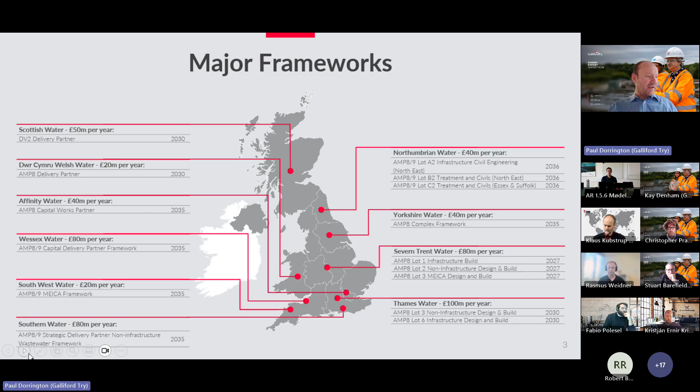So in a nutshell, that's me wrapping up the overview of Galliford Try's environment division. At this point, I'd like to hand over to my other presenting colleague, Stuart Barefield, who will talk specifically about PFAS within the UK.

Yeah, do you want to jump on the slide and move that one forward then, please, Paul? Yeah, it's just really to put a bit of context to why we're here. Obviously things are starting in the current investment period in terms of the guidelines really coming in from the DWI, based on a sort of tier structure to initiate actions really.

But looking further afield, Denmark - this is one of the reasons we're here - is because effectively Denmark have been doing this for longer, and they've also got some very stringent standards, which are actually in exceedance of the European standards. I've been to recent conferences, there's been the British Water event recently in Warwick, the Institute of Water. Some of the messages we're getting all the time across the industry are about collaborating and innovation. I thought this is a fantastic opportunity to reach out to Klaus and the Danish market really to understand what they're doing and see what we can learn.

Should be a little slow today.

So part of the introductions today to the topic, we are so fortunate to have Jonathan Gull Christensen from the Danish Technological Institute, who is a consultant within wastewater and residues from the wastewater. He holds a Master of Engineering in Biotechnical and Chemical Engineering, and over the last couple of years he has developed into one of the most knowledgeable experts we have in Denmark within the removal and destruction of PFAS from water, and he is also behind the idea and concept of the PFAS treatment train, which we will also see in action today. So, Jonathan, please take it away.

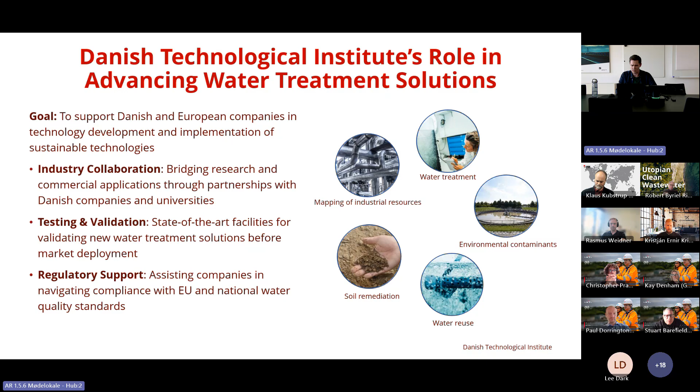What I'll be going through today is to introduce the problem. I'll only very briefly touch upon the problem of PFAS because I think we're all aware of that. Then I'll delve into some of the treatment technologies, and I'll have two cases here from Denmark. Of course there are many more projects going on, so I had to select a few now that I only have 20 minutes. Then I'll very briefly touch upon destruction technologies, and summarize in the end.

I'll just bring up a pen here. So, how it stands today is that we have PFAS everywhere in our environment. It has been in production for many years by now, so we see it in our groundwater, freshwater, marine environment, and everywhere really. And this is, of course, the PFAS that's already there, but we're also still sending out further PFAS into circulation.

And this primarily comes from different point sources. Those could be waste management sites or different landfill sites where you have leaching out into wastewater treatment plants. And the wastewater treatment plants in Denmark are really good at removing different organic matters, also nitrogen and phosphorus, but they're really not capable of removing environmental contaminants in the same way, such as PFAS.

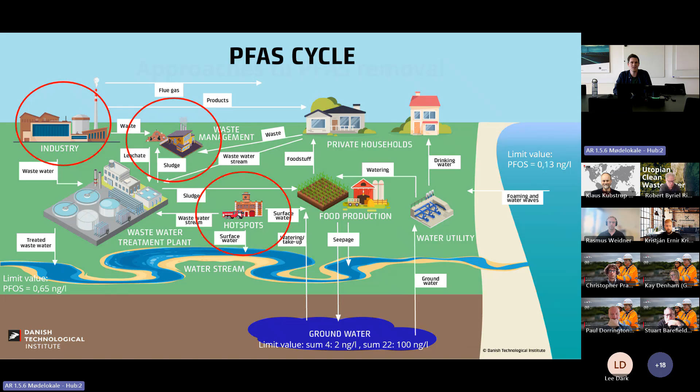I'll continue on to the PFAS removal, because that's what we're here for today. I like to divide it into two, because whenever I say PFAS removal, it has to do with both removal from the wastewater stream or from the environment, and then also a destruction process afterwards. So it's kind of a two-sided or two-stage process.

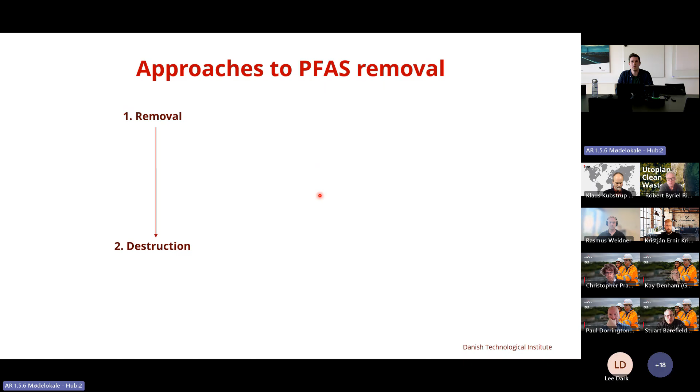Because if we only remove the PFAS, and then put it in another landfill site where it can leach out again, then we haven't really got to the core of the problem. So we have to also destroy and actually remove PFAS from this circulation in order to really get to the core of the problem. And that means complete defluorination of the fluorinated carbon compounds, which are the PFAS molecules that we are focusing on today.

When talking about removal more specifically, we can divide it into a more centralized or decentralized approach. A centralized approach would be to take care of the problem at the centralized municipal wastewater treatment plants, where we have most of the wastewater coming through, and then we will be able to implement different steps in order to accommodate the PFAS problem.

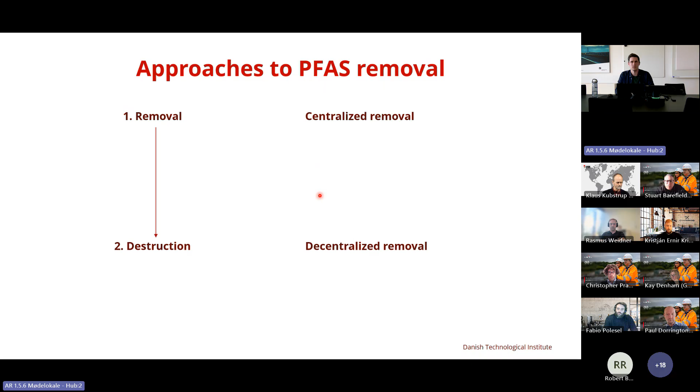Or you could do it more decentralized, where you focus on different point sources where you have more concentrated PFAS streams and remove it there before it's mixed with the rest of the municipal wastewater. And of course, there are pros and cons to both of those approaches, and probably both will be in use in the years going forward.

But if you do have a centralized approach, of course, as with everything, you'll have the economy of scale. Also, more specifically related to PFAS, there will be a lower organic matter contamination after the water's gone through the municipal wastewater treatment plants. This has a lot to say when we're talking about adsorption technologies for PFAS removal afterwards, since this then lowers the amount of other co-contaminants.

But of course, if we go for a centralized approach, then we'll also dilute our contaminants before treatment, and we'll have much larger volumes to treat. So these will be some of the cons of a centralized approach.

If you are to go for a decentralized removal approach, then you'll go directly to the source where you have high PFAS concentrations. You'll have minimal dilution of your contaminant. So you'll be able to remove bulk of the PFAS before you mix it in with remaining municipal wastewater with lower PFAS concentration. So you'll have lower volumes to treat.

But of course, you won't have the same economy of scale. And you will also definitely have a higher water variability. So it will not be as predictive as to what kind of wastewater will be coming into your plant throughout the year, or depending on the different cases. And you'll definitely also have many more co-contaminants than when mixed with the municipal wastewater.

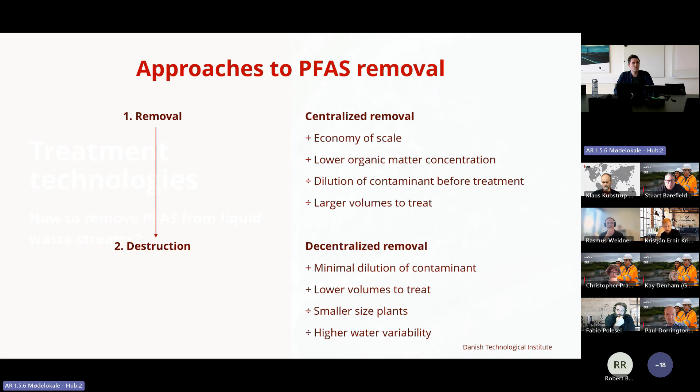So going over some of the treatment technologies and how to remove PFAS from liquid waste streams. The established solution, you might have heard this before, but I'll just say it again, adsorption is the established solution to PFAS removal.

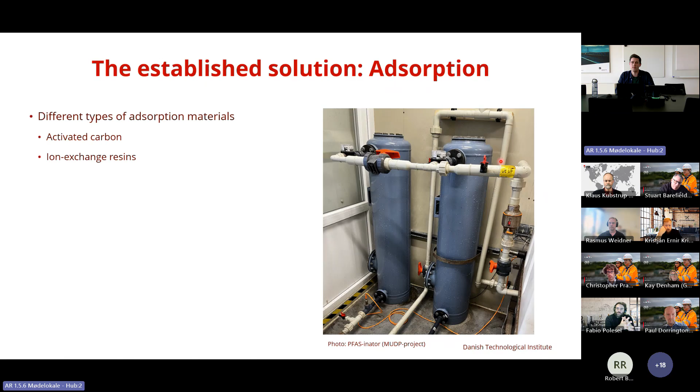This involves different types of adsorption materials, including different types of activated carbon with high surface areas, which are very good at adsorbing all kinds of organic molecules, including PFAS molecules. But mostly it will be tailored for longer chain PFAS molecules and not so much the shorter chain PFAS molecules, which are more mobile in the water stream and won't attach as much to the activated carbon. And then you also have ion exchange resins, which are more tailored towards targeting PFAS in general and also shorter chain PFAS molecules compared to activated carbon.

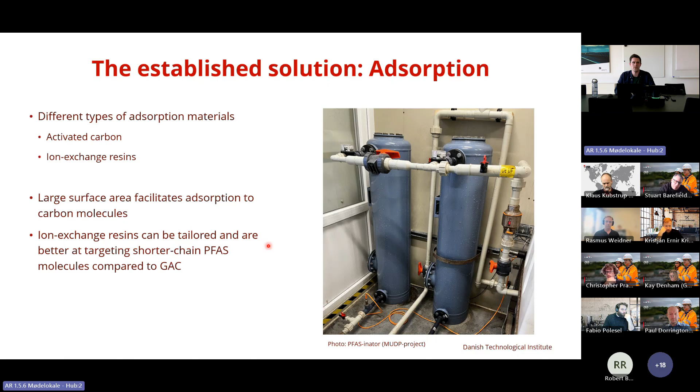Those are also more expensive to use, so it will also be a balance between what expenses will be there and what type of wastewater you have coming in, because the wastewater should be as free of other co-contaminants as possible before you send it through your ion exchange resin.

As Klaus mentioned, I don't think I invented the treatment train. It's just a word we use for a combination of different technologies for any particular treatment solution. But it's a good way to look at the PFAS problem, because often you'll have to have a sequence of different treatment technologies in order to achieve the removal rates of PFAS that we would like.

For instance, if we were to go for groundwater treatment, as we do here in Denmark, mostly we can make do with very little to clean our groundwater. But actually, Grundfos, that I know is present here today, have set up at least two places that I know, ion exchange resin filters, in order to remove PFAS and provide clean drinking water for water utilities here in Denmark, where contamination has been found, and with great success.

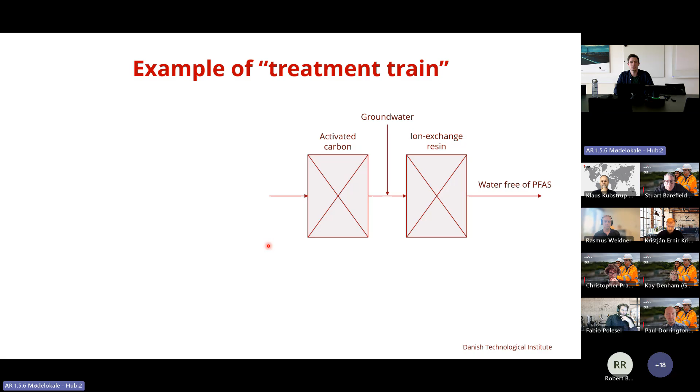And then if we were to have some more contaminated water, that could, for instance, be drainage from firefighting areas, where you would have particles and other co-contaminants that you would first remove in a filtration unit, and then afterwards send through an adsorption column or two.

And then if we were to go for even higher pollution waters, that could, for instance, be different types of industrial wastewaters or leachate from landfill sites, which is very complex water with lots of organic material. Then you would definitely need further pre-treatment steps in order to remove most organic material and co-contaminants, and then in the end, that water would be able to be sent through an ion exchange resin in order to remove the remaining PFAS. And then, of course, you'll have some sludge produced, which would have to be destroyed in a destruction technology.

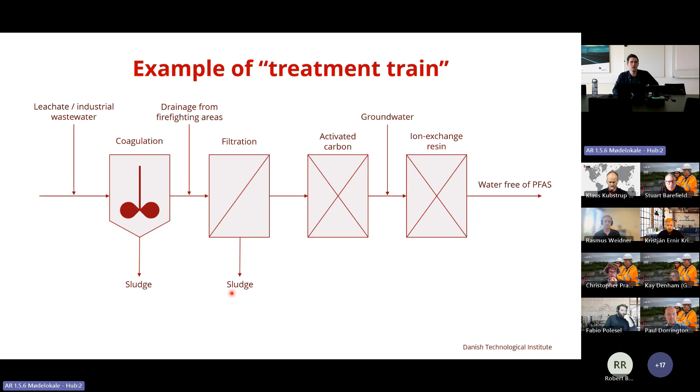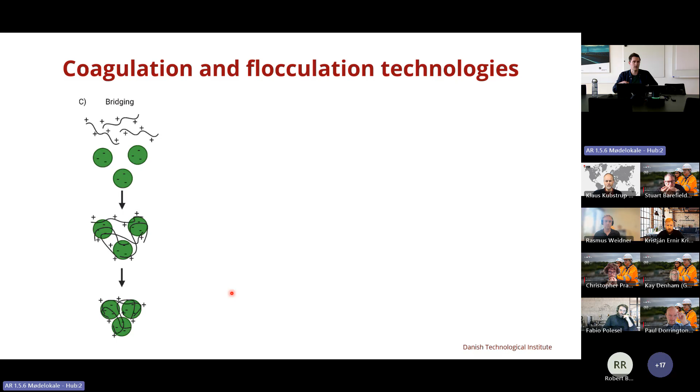But adsorption is not the only technology that we use to remove PFAS from wastewater. There are also other technologies being implemented. One of them is to use coagulation and flocculation technologies. This is a very common technology within wastewater treatment that you use in many instances to remove organic matter and other matter from wastewater. What you do here is you add metal salts and polymers in order to make particles clump together, and then you'll be able to remove them from suspension.

And then you would have a sludge, which you can destroy, and then you would have your water fraction, which would be free or at least almost free of the molecules you would like to remove. This technology can also be used with special chemicals, not PFAS containing chemicals, but chemicals which would actually help adsorb and keep PFAS bound to the sludge phase, so it can be removed using a combination of coagulation and flocculation chemistry. So that's one approach, which is outside of adsorption.

Then another one is to use the surface active properties of PFAS molecules. That would be via either foam or bubble fractionation, where you send air through a column of contaminated wastewater. In this way, you will have PFAS accumulating at the interface between water and air, and it will accumulate in the foam that you can then collect. This collapsed foam can then be sent through this process repeatedly in order to produce a very PFAS-heavy concentrate, which could then be destroyed afterwards.

And then you'd have your effluent free of PFAS if you're dealing with longer chain PFASs, but if you're dealing with shorter chain PFASs, then probably you'll still have to do some additional steps in order to get rid of the last short chain PFAS molecules. This is kind of the same when we're talking about coagulation technology, that we'll be able to remove most of the PFAS, but there will probably still be some of the shorter chain PFAS molecules present.

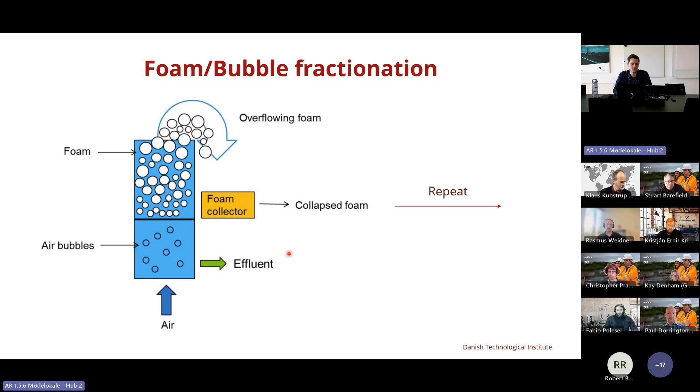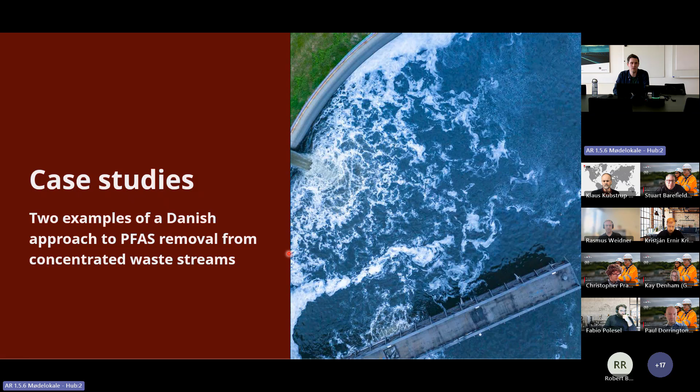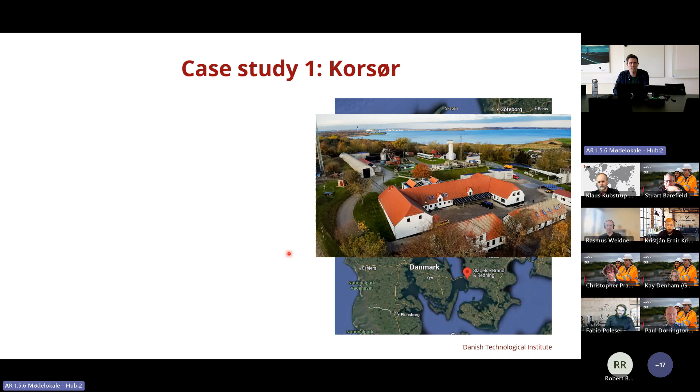But before I sum up, I'd like to briefly go to case studies from Denmark, because I think it's interesting to go into concrete cases. One of them, I think Klaus, you already mentioned this briefly. This is on Zealand on the eastern part of Denmark, where there is a firefighting station. This has come to be known as the ground zero for PFAS contamination in Denmark. This was where in 2021 people found out that PFAS was leaching out from this firefighting training area into the nearby meadow.

That contaminated cows grazing at the meadow, and it ended up in their meat. When people ate that meat, they had elevated PFAS levels in their blood. That was why people actually became concerned about PFAS contamination in Denmark. And it has just snowballed from there, really.

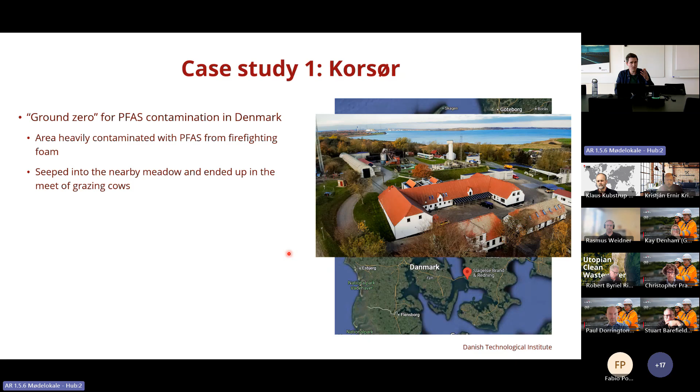With this ground zero - and we have many firefighting schools like this in Denmark, and I guess you probably have as well in the UK - with this in mind, several PFAS treatment systems were set up to be tested at this site in Denmark. It has been used as a test center where different companies set up treatment systems. Today, the Danish company ULTRAAQUA runs a treatment plant that collects all the drainage from this area and from the nearby meadow, then treats it to remove PFAS so it doesn't leach further into the environment.

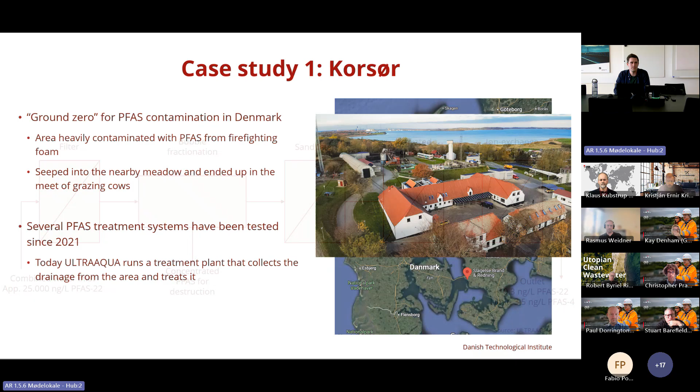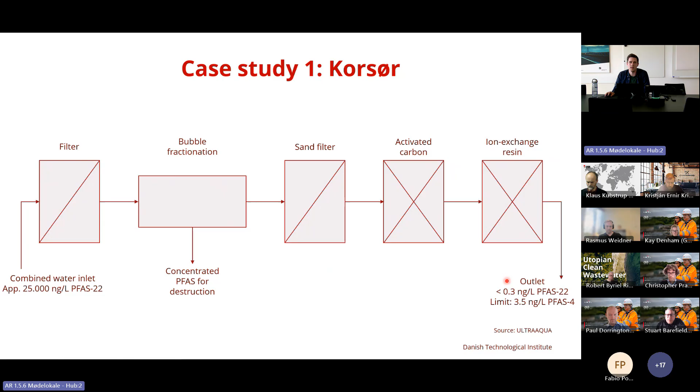This is just a real-world example of a treatment train, so you can find more information on ULTRAAQUA's website. Here they have a filter that takes most of the particles as they come in from the meadow, and then they use their patented bubble fractionation technology to remove the bulk of the PFAS. Then through a sand filter and two adsorption columns, one with activated carbon and one with ion exchange resin, they are able to meet the very strict guideline limits for the outlet of PFAS. So they remove from elevated levels above 20,000 nanograms per liter down to almost detection level limits, well below the limits in their outlet.

There's also another case from the northern part of Jutland in Hjørring, where the local wastewater treatment plant had exceeded PFAS limits in their sludge, most of which is used for field application to recycle nutrients in Denmark. But you can't do this if the PFAS levels are too high in the sludge, so they did have problems with this.

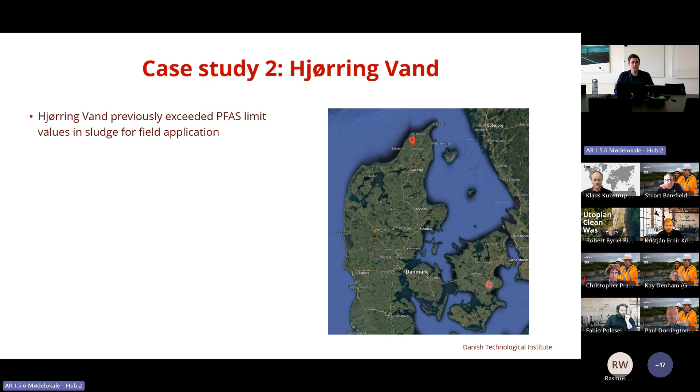This was to do with several old landfills they identified, and an oil treatment company in the area around the wastewater treatment plant. So they decided to set up a PFAS treatment system to handle all the PFAS contaminated streams before they were mixed in with the municipal wastewater - a kind of PFAS pre-treatment plant set up at the wastewater treatment plant, just to take up the bulk of the PFAS before it was introduced and mixed with the rest of the wastewater.

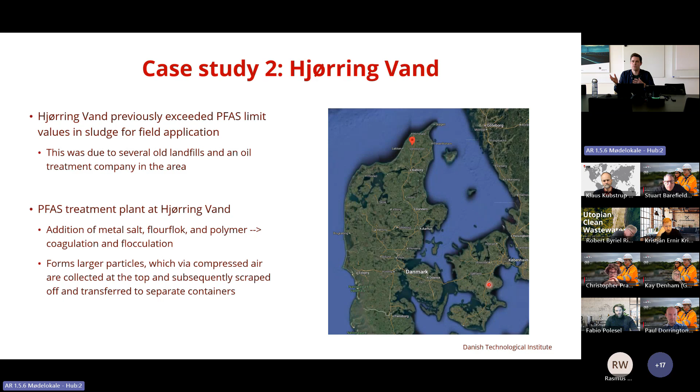What they do there is go for the coagulation approach, where they add metal salts, a PFAS binding chemical, and polymer, and then they're able to form large particle flocks and remove them afterwards. The system there is provided by the Danish brand of the company ECT2, Montrose Environmental Group.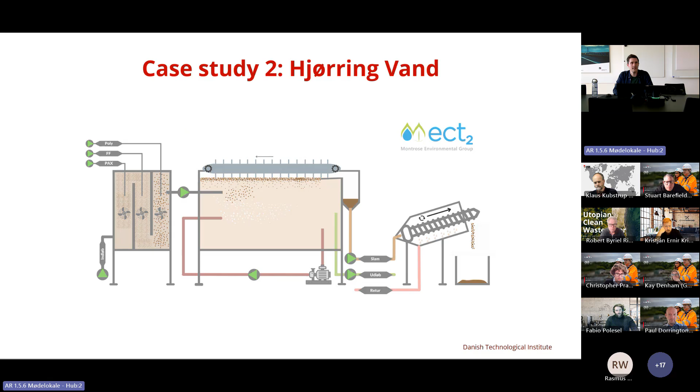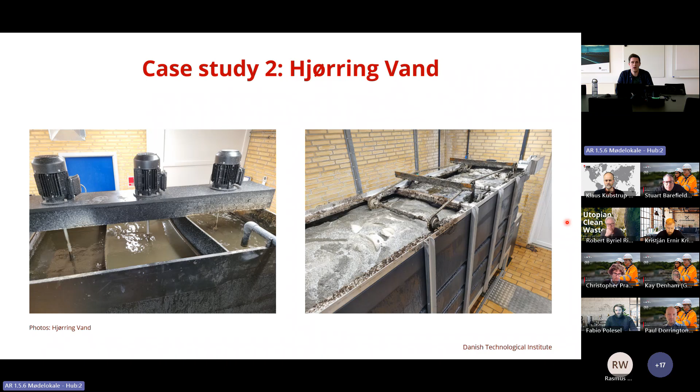And what it looks like is this. On the left here you would have the flocculation, the chemical addition to the wastewater. And then over here you will have all the air being introduced in this flotation plant, and then you'll have the wastewater contaminated with PFAS skimmed off at the top. Afterwards, this sludge can be dewatered and sent for PFAS destruction, and then you would have removed most of the PFAS in the wastewater going into the plant.

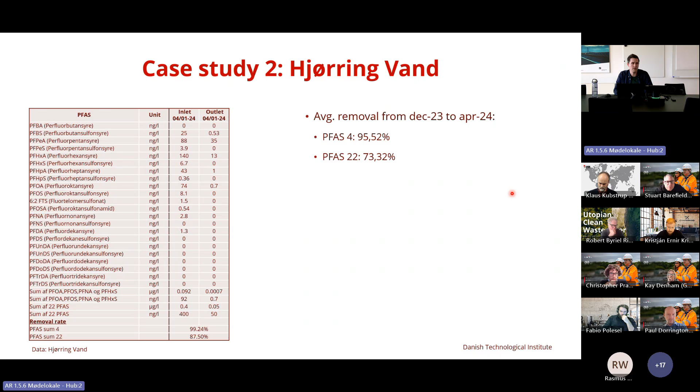They also let me show a little bit of the data from their plant. As you see here, this is not a 100% solution for PFAS removal. It removes the bulk of the PFAS and has been doing so since the end of 2023, where most of PFAS 4 and more than 70% of PFAS 22 is removed in this plant.

This has been enough to actually lower the PFAS levels in the sludge at the municipal wastewater treatment plant to below the limits they have to abide by, and also for their effluent to be clean enough to send out into the recipient water afterwards. Of course there will be differences in the short and long chain, as you see here. For instance, PFPEA will be one of the ones which are not reduced to the same extent as maybe some of the longer chain PFASs.

And as I said, when you're dealing with a more decentralized approach where you actually take out the PFAS from the point sources, then you'll be able to just treat smaller volumes instead.

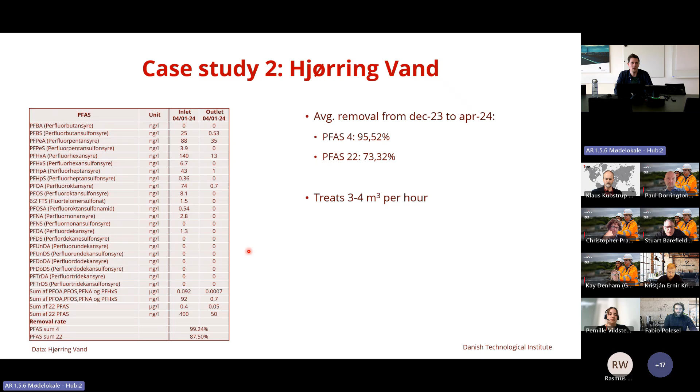Just one slide on PFAS destruction, because this is also very important. Today, the destruction standard is that you incinerate whatever PFAS concentrate you have once it's removed from the environment or wastewater, and incinerate at high temperature because it requires a lot of energy to break the fluorine-carbon bonds and completely defluorinate the PFAS molecules.

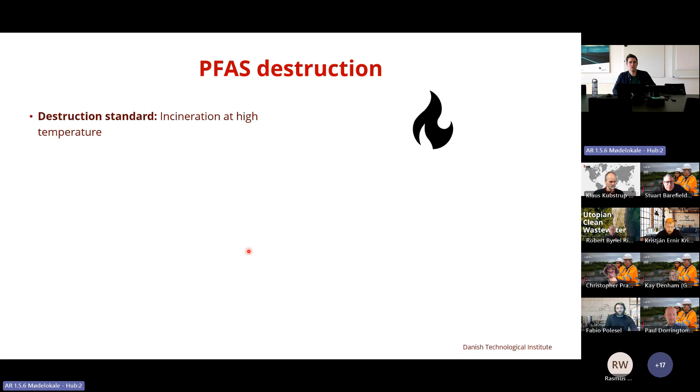But there are definitely also other solutions being introduced. I'll mention a few Danish alternatives. There's the Danish company Aquarden, which is working with supercritical water oxidation and has set up 2 plants in France operating to destroy PFAS with their oxidation technology.

Then we have ULTRAAQUA, which I also mentioned, that has the treatment plant at Korsør. They have some pilot scale vacuum UV units set up in order to destroy PFAS using their UV technology. I've heard they had good results from testing on the water from Korsør.

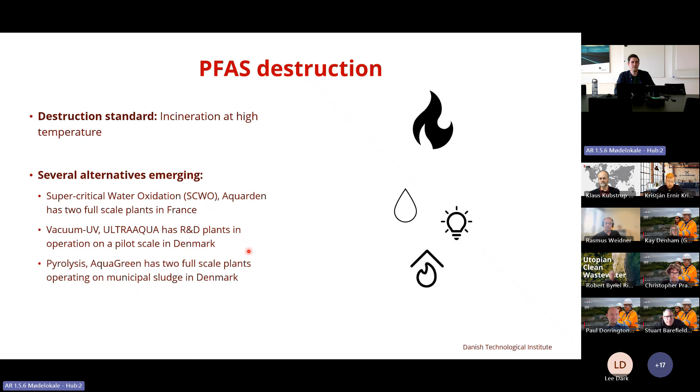And then we also have different companies providing pyrolysis technology. AquaGreen is one of them. They have 2 full-scale plants operating on municipal sludge here in Denmark. One of the advantages of this technology is that it can help break down PFAS during the pyrolysis process. So I think that was more or less it.

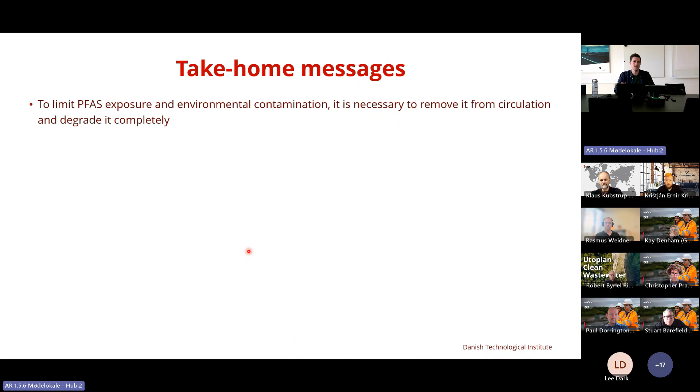Just to summarize: if we are to limit PFAS exposure, we need to both remove and completely break down, destroy PFAS, and different scenarios call for different tailored solutions. We do have adsorption as an established technology we can use for removal, but it will definitely require pairing with other types of technology in some kind of treatment train for most instances.

And then we have other technologies which are also coming in and being developed and used for different use cases for PFAS removal. Incineration is the standard approach we use today, but there are definitely many technologies being introduced, and this is also one of the very important areas to do further research in order to have good destruction technologies for PFAS.

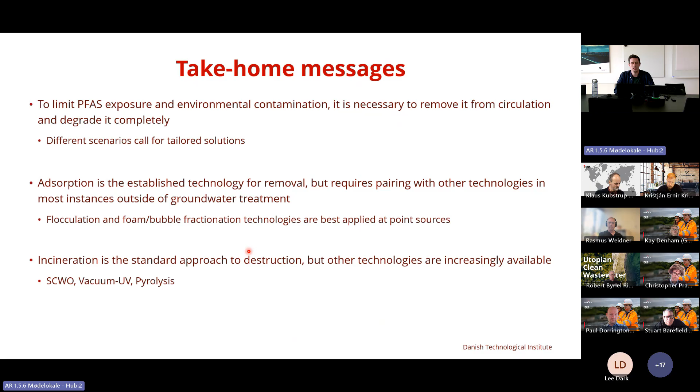Maybe I went 2 minutes over my time, but thank you so much for listening, and then we'll have time for questions afterwards, I think.

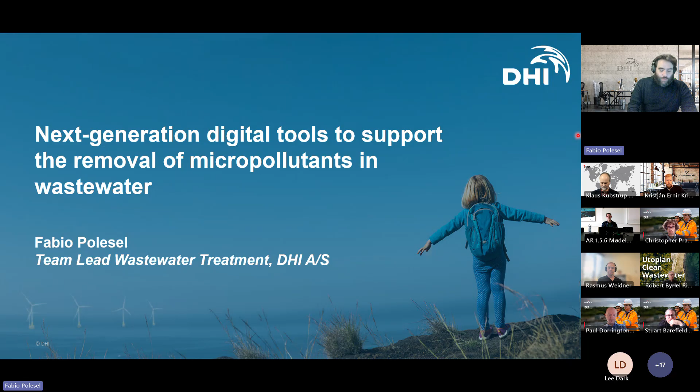A few words about DHI. DHI stands for Danish Hydraulic Institute. We have a headquarters in Denmark, north of Copenhagen in Hørsholm, and we also have an office in Aarhus. But we actually have offices or agent representations on 5 continents, including an office in Southampton in the UK.

Very briefly what we work with: we hold strong domain knowledge and also modeling related knowledge to tackle water related issues in various contexts, in pretty much three contexts: water in cities, so water quantity and water quality related issues in urban areas, marine and coastal environments, and also water-related issues on renewable energy and water resources, so groundwater and inland water systems.

As I said, we provide advisory to various types of clients: technology suppliers, authorities, water utilities, governmental agencies. Modeling is well rooted in our DNA, and it's part of our advisory services. But we also provide modeling software to external users, to clients, as part of our MIKE powered by DHI software suite, which allows modeling of water in various systems.

And we see increasing efforts to tackle the micropollutant issue at the regulatory level, at the European and Danish context. So the regulation itself, as we probably like to do things in the European Union, is also quite complicated.

But looking at wastewater treatment plants, we have a recently approved revised European Wastewater Treatment Directive that sets mandates that 12 substances are removed through what we call advanced quaternary treatment in municipal wastewater treatment plants. Removal efficiencies above 80% need to be achieved for plants above 10,000 PE for sensitive recipients, or above 150,000 population equivalents no matter what.

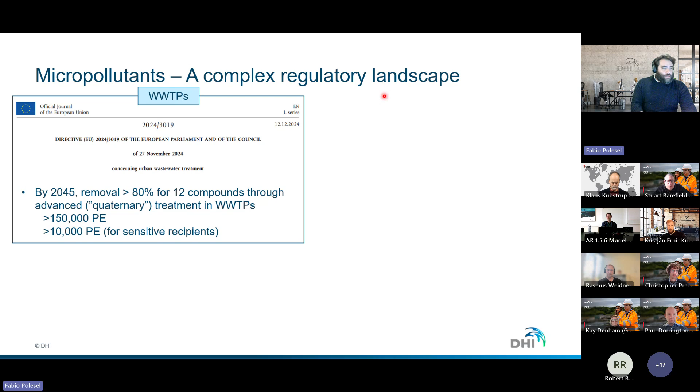This directive is enforced since the 1st of January, so that's something utilities in the European Union will have to face sooner or later. On the other hand, only 12 compounds are being regulated, and these are pharmaceuticals and benzotriazoles.

But we also see increasing discussion and preliminary information on the Water Framework Directive that sets environmental quality standards in the recipients. This is in discussion—there's a preliminary provisional deal that sets environmental quality standards for 24 PFAS and other substances like bisphenol A. When we think about effluent discharges in recipients, these new limits will have to be fulfilled. So this is 12 compounds from the Wastewater Treatment Directive plus additional substances.

And we also have a quite outdated Sewage Sludge Directive. Sludge is also a source of micropollutants in the environment through land application. Right now, the Sewage Sludge Directive is 40 years old, and it sets limits only for heavy metals.

But as we know, PFAS is accumulating in sewage sludge quite extensively, and there is ongoing focus on setting limits for substances also in sludge. I'm just sharing here an example of what has been assessed at the moment.

This is a report that DHI has contributed to for the Danish Environmental Protection Agency that sets a recommended threshold value of 15 micrograms per kilogram for the 4 key PFAS in sewage sludge. This is not a regulation, but it might end up in regulation pretty soon.

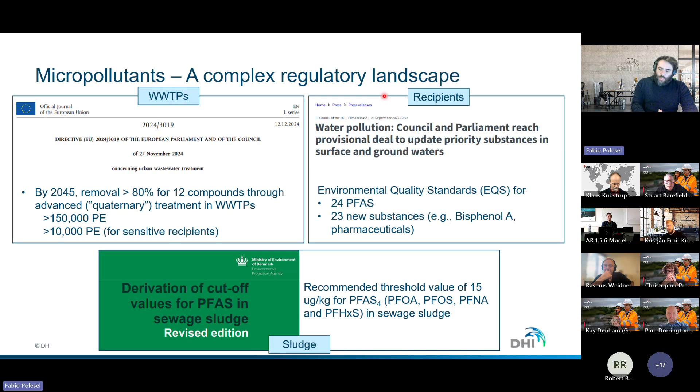How can we tackle the micropollutant challenge? Well, of course, the two key actions so far have been to monitor their occurrence in the water cycle and, where needed, implement advanced treatment technologies.

But we have, you can say, a third action, which is to use digital tools and modeling to support these two other actions. And this can provide benefits.

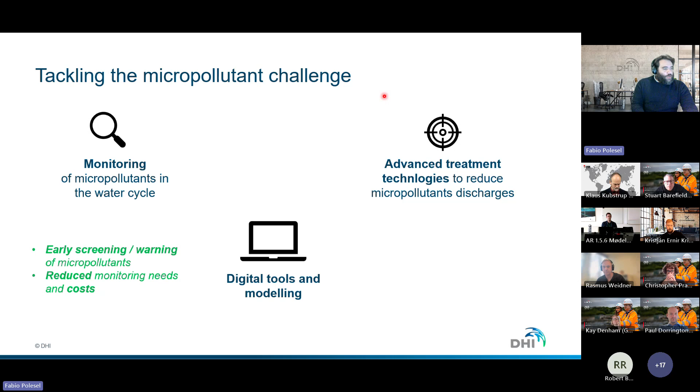On the one hand, it can help reduce monitoring costs by doing early screening of micropollutants—finding out which micropollutants are actually occurring or more risky in the water cycle—and therefore reduce the costs of monitoring and analytics, which we know is quite expensive.

And on the treatment side, digital tools and modeling can help upfront in identifying whether wastewater treatment plants need to be upgraded or retrofitted. And if this need is fulfilled, it can help technology suppliers in designing and commissioning these advanced treatment steps.

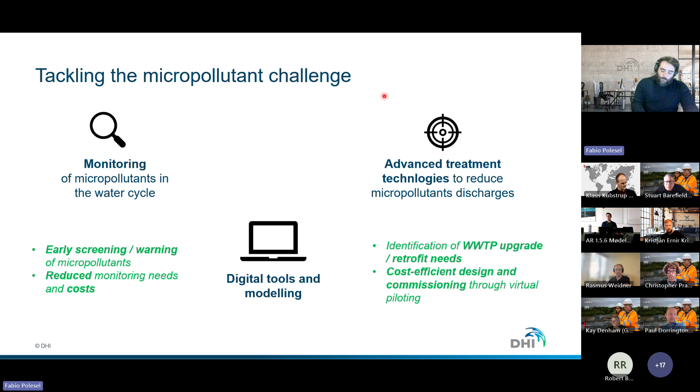This said, I would like to present you three examples of how we have applied digital tools at three different steps—you can say in the water cycle, but also in the life cycle of a treatment plant.

As I said, we can apply digital tools to screen compounds of potential concern, not just in the treatment plants, but also upstream in catchments.

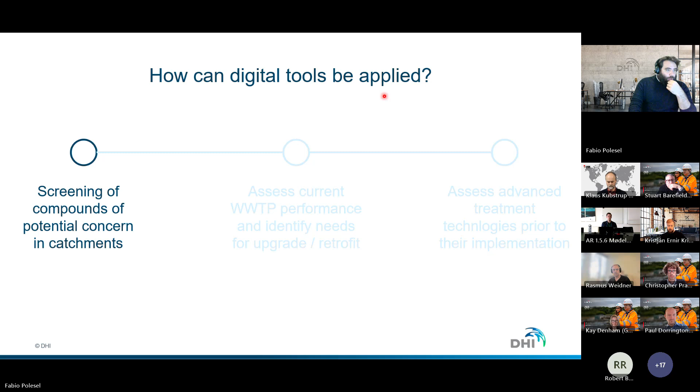One example of this is a tool that we have recently extended as part of the VUDP, a water development and demonstration program in Denmark. It was a project called Rainwater Quality, Regnvandskvalitet, where we developed a tool to help utilities screen stormwater discharges.

So we focus a lot on municipal industrial wastewater, but actually stormwater discharge can also bring through runoff from industrial areas, pollutants in the recipients. So this tool, and I'm showing here an example for a catchment in the city of Esbjerg, allows us to predict the expected concentration of 78 substances, including 4 PFAS, in the recipients in relation to stormwater discharges. This can help the utility and the authority applying for permit, first of all identifying which compounds can be a concern. It can help them in the application for discharge permits, and also help them identify whether some treatment of the stormwater needs to be implemented to mitigate the risk.

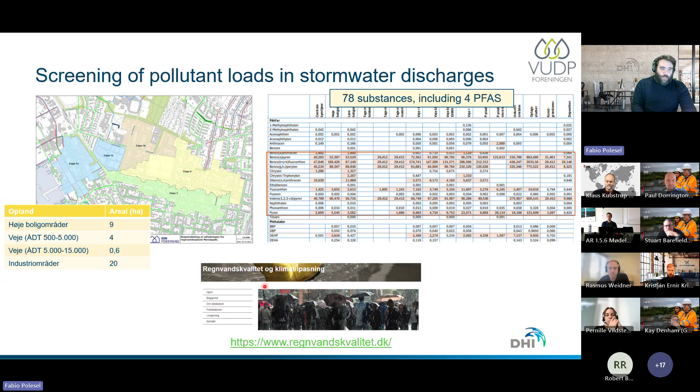The second example I wanted to show you is how we can use models to assess the performance of currently operating wastewater treatment plants, finding out whether they are already performing well or not performing well enough in the removal of micropollutants. This is an example from a model we implemented using our in-house software West, where we helped a water utility understand how the treatment plant is performing with respect to the removal of PFOS and PFOA. What they could observe was that effluent concentrations were systematically higher than influent concentrations, so there was probably some formation from precursors in the conventional treatment. But we could also see that the concentration in biosolids was significant, meaning the utility might need to implement additional treatment to reduce the concentration in the biosolids before they are applied on land.

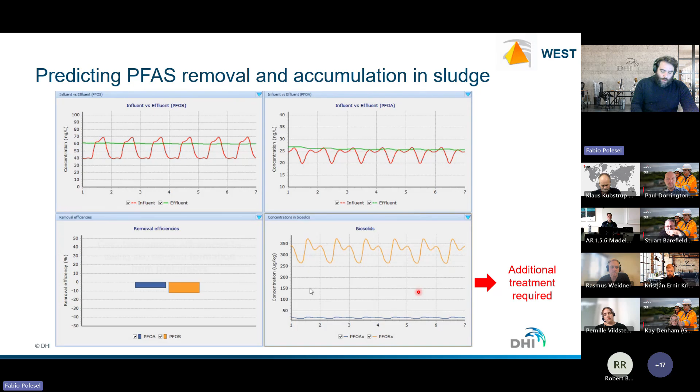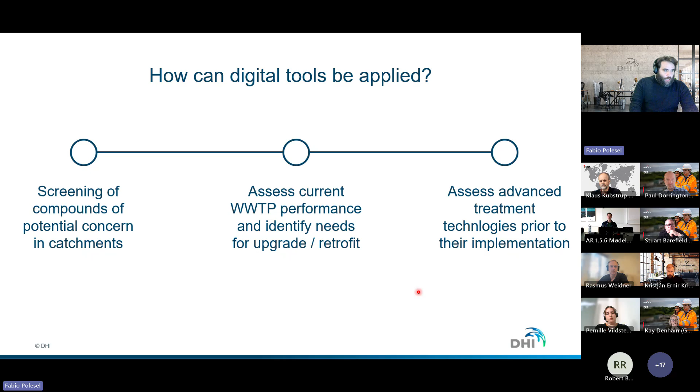And finally, the third example is moving to the last step, when the need of advanced treatment is acknowledged. How can digital tools be used to support the design and implementation of advanced treatment? Here, as Klaus has nicely introduced, I'd like to present the example of bisphenol A. We know it's not a PFAS, but it is a very similar situation, because it is not targeted by the revised Urban Wastewater Treatment Directive, but in Denmark, and soon in Europe ideally, there will be quite stringent environmental quality standards in the recipient. This is an example of a study we did in one of the largest treatment plants in Denmark, trying to find out whether, with the current conventional treatment, we can remove bisphenol A to the required level set by the environmental quality standards. And the answer is no. As you can see from this picture, the conventional treatment is pretty good at removing bisphenol A, more than 90%, but still not enough to achieve the EQS.

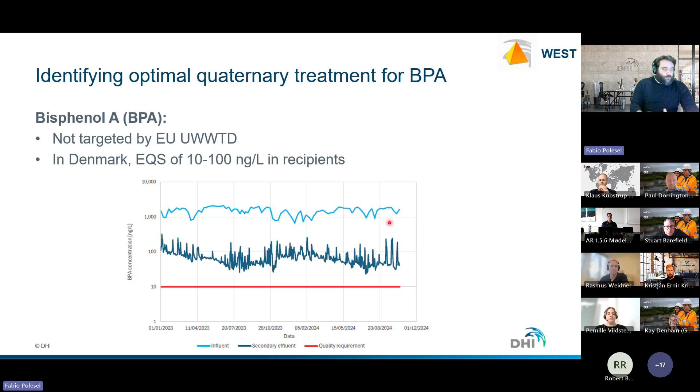So what we used the models for is to assess the best setup to actually bring the concentration of bisphenol A down to the EQS limit. Thanks to the capabilities of our software, we could implement how a treatment train could look with ozonation and activated carbon. We compared the performance of this combined system with ozonation alone and with activated carbon alone, and based on our initial evaluation, the combination of these two advanced treatment technologies was the most suitable. First of all, because it brings down, as you can see from the purple line, the final effluent concentration below 10 nanograms per liter. Of course, at some point the activated carbon gets saturated and needs to be regenerated. But comparing with the single treatments, we could see the combined treatment was beneficial by reducing the ozone dose and also doubling the lifetime of GAC. So if GAC was implemented in combination with ozonation, regeneration would be required every half a year, as opposed to every 3 months.

Fabio, you had to end in 1 minute. Yes, I'm done, that was my last slide.

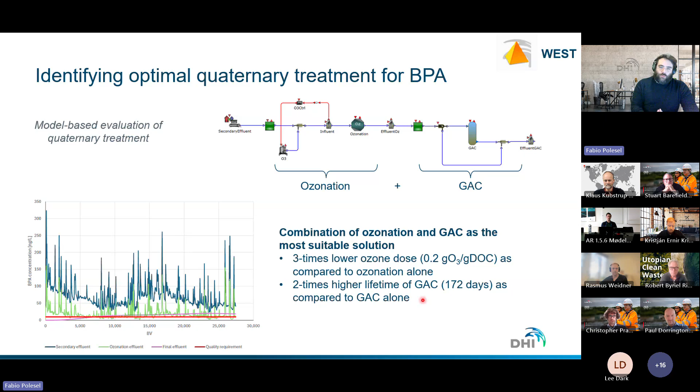So that's an example of how we can use digital tools to virtually design and operate some of the treatment trains that were presented before by Jonathan. So that was it from my side, and thank you again.

Thank you. So we'll just go back to us presenting here. Thank you both to Jonathan and Fabio for your very in-depth presentations on the problem, trying to provide an overview. We do also have various individual solutions present, which we'll show in the next slide.

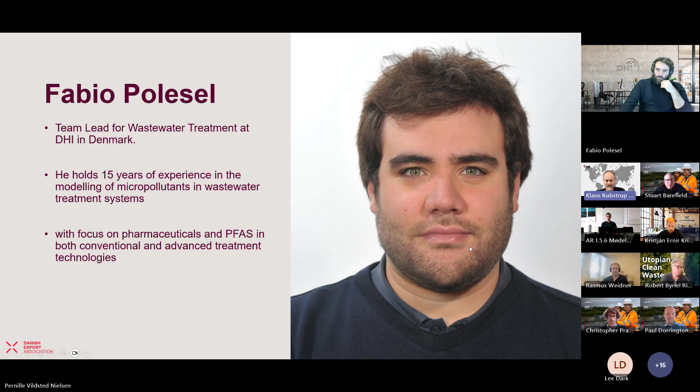My idea and ambition was to present this as a table, which was not possible because the solutions are quite different. And I've also not provided the opportunity to the suppliers to speak today, because they're salespeople, and I know they can't keep it short - you have to trust me, I'm a former salesperson myself.

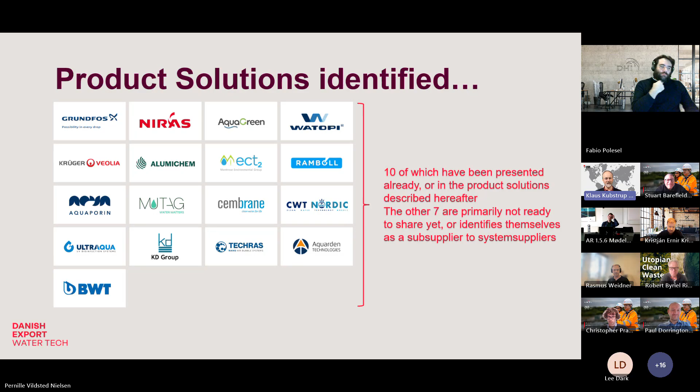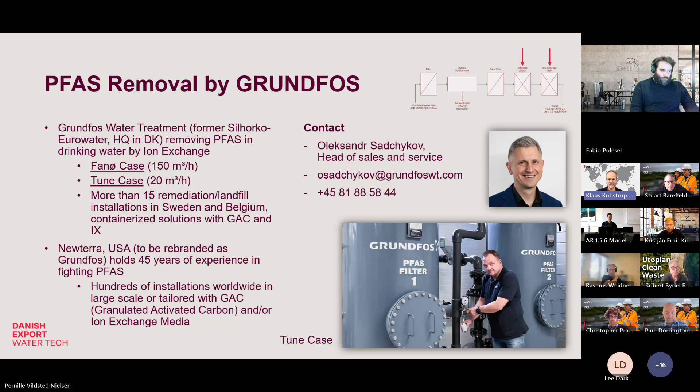The other one is Newterra in the US, which is also going to be rebranded to Grundfos. They have hundreds of installations worldwide, also large scale. The contact here is Oleksandr Sadchykov, head of sales and service. If we take Newterra, again it's the same - granulated activated carbon, ion exchange, and reverse osmosis, running a lot of systems and pilots, and also able to run life cycle service on them.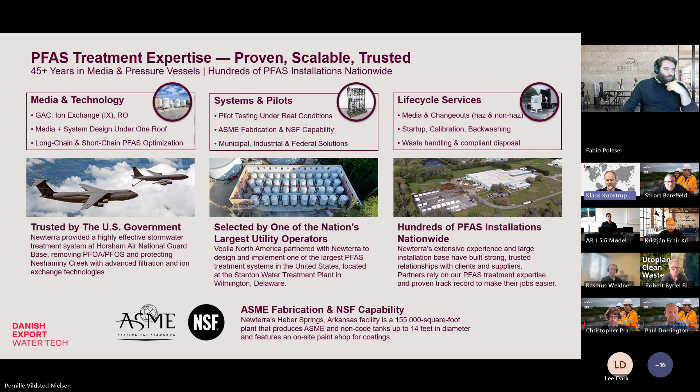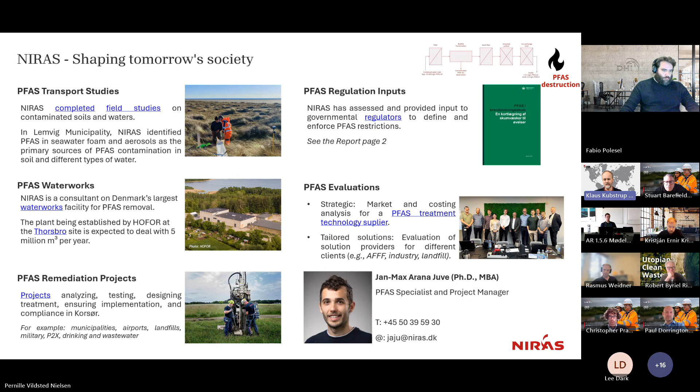Next, NIRAS, also a very important contributor here as an advisory company, doing a lot of work within different fields, where we can see different contaminants in seawater, foam, waterworks, also in terms of soil. They've also provided a lot of input to governmental regulations in terms of enforcing PFAS restrictions in Denmark, plus a lot of experience within PFAS destruction and evaluation of different suppliers. Your contact here is Jan-Max Arana Juve.

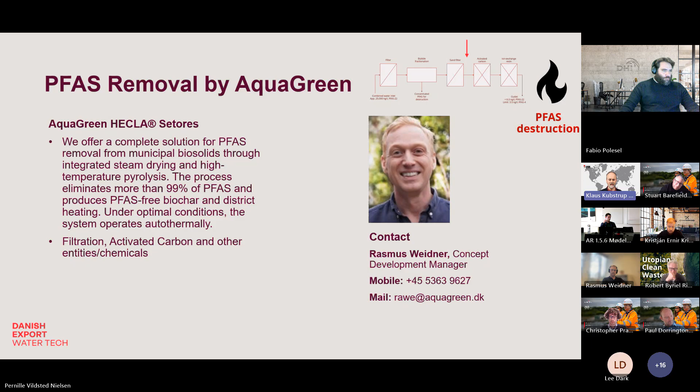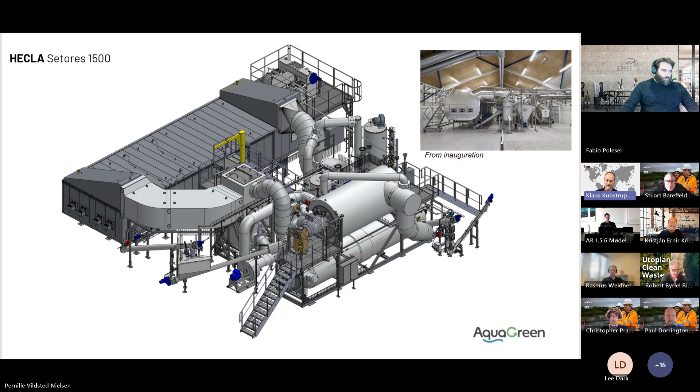So what you see here is actually, this is not just research, this is not just ideas - these are actual installations and things in operation that you're being exposed to here, and I think this bridging of the gap from Denmark to Britain makes a lot of sense.

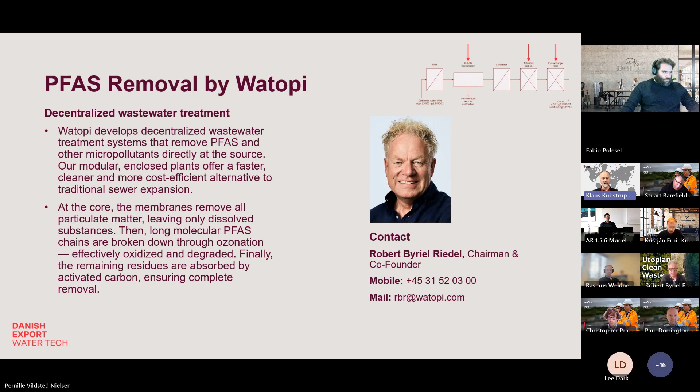The next one is Watopi, which is able to make decentralized wastewater treatment systems to remove PFAS and other micropollutants directly at the source. As you can see, it goes in at various points in the cycle in terms of removing the PFAS. There's also a system from a new plant in Odense, which is in operation, with a lot of experience here.

Then the next one in line is one of the really big suppliers here of complete systems. Krüger is the Danish part of the Veolia group. Krüger is situated in Denmark, and as you can see, the complete group is very, very big. Of course they're able to handle the complete treatment chain, and various solutions, including PFAS destruction.

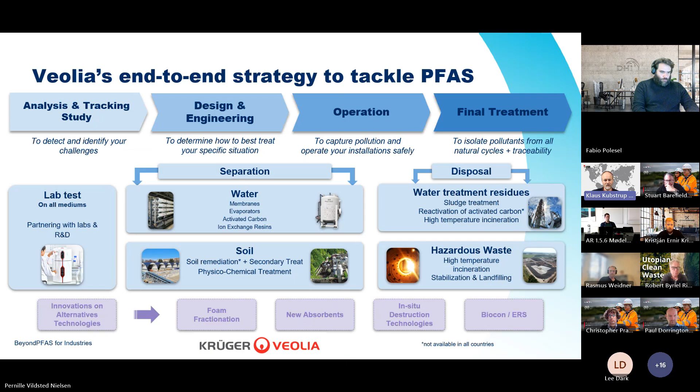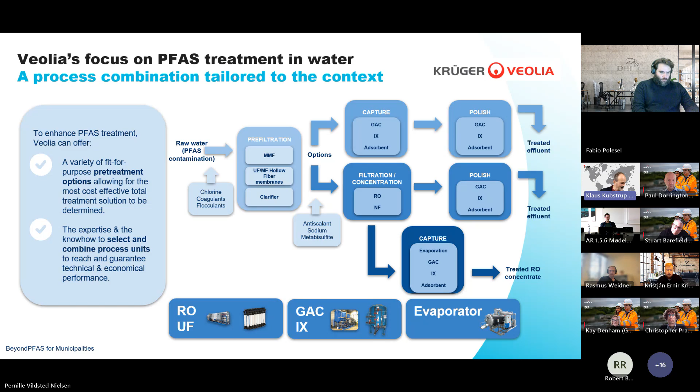If we look at some of the highlights, they can take everywhere from the laboratory test to the separation and disposal - everything in the chain. Here's even more detail on what kind of systems they supply, and on the first slide there was your contact. As you can hear, I'm speeding up because we're a little bit under pressure if we want to have questions also at the end, to recover some lost time.

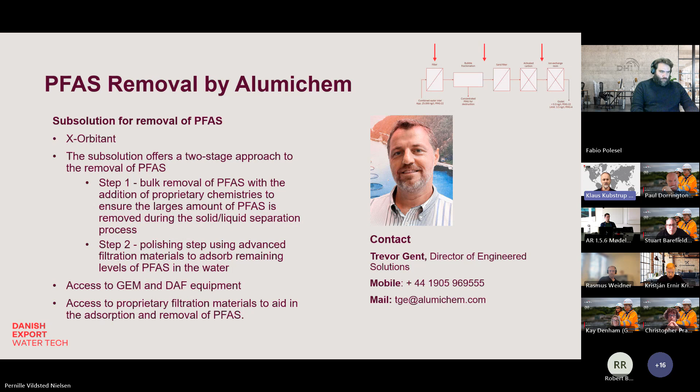Now we've come to Alumichem, which is basically offering a two-stage approach - both in terms of improving the flocculation for bulk removal of PFAS, adding proprietary chemistry to secure a good separation in the process, and then also polishing afterwards, with access to a lot of different gear and systems for testing on your actual wastewater whether it works or not, plus proprietary filtration materials.

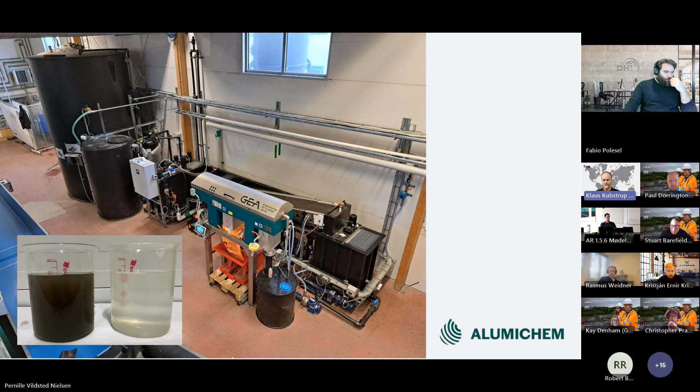This is how it looks, and as you can see, this is a very effective process also from Alumichem. Next in line is Aquaporin.

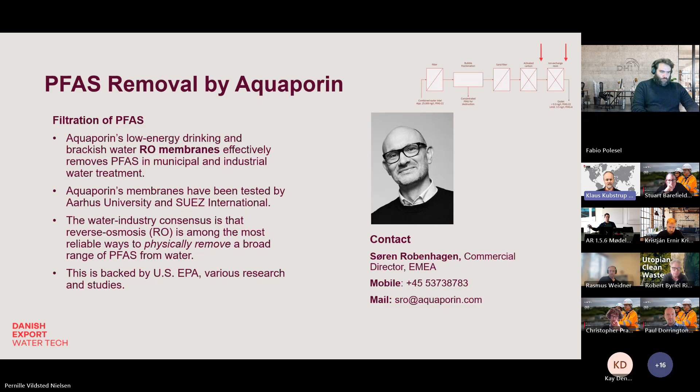One of the things we haven't mentioned a lot is reverse osmosis membranes, which is also an effective way of removing PFAS, both in municipal and industrial water treatment, and has been tested both at the University of Aarhus, who's also present here today, and Suez International. There's consensus in the industry that this is one of the most reliable ways of physically removing the broad range of different PFAS chains from water, and it's backed by the EPA in the US.

We are moving on here. Another great picture.

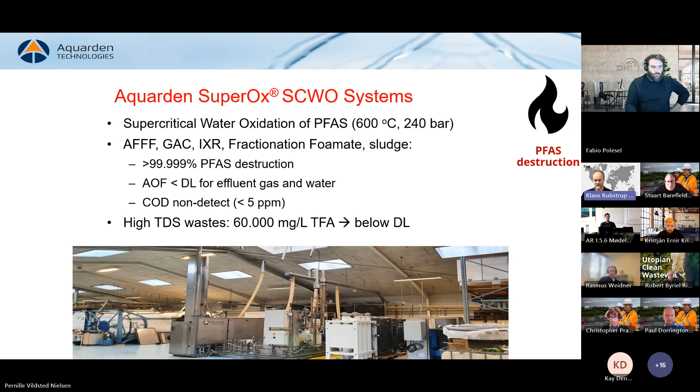Now we have Aquarden. I think that was better presented by Jonathan than what I can do, but I can just say that the essence here is that you bring it to the supercritical conditions of high temperatures and pressure, under which the organic compounds are broken down in water, by bringing it to these supercritical points. So you separate the water, the CO2, and the inorganic salts from each other using this innovative process.

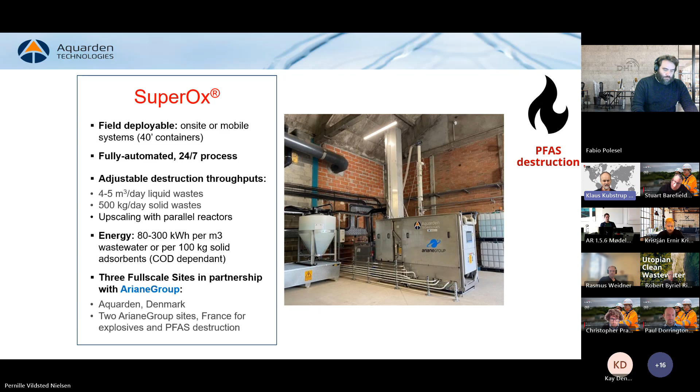A little more here, you can also see this is a system that is actually working, both in Denmark and at two sites in France. So again, this is real and live examples. This is not just ideas. These are actually technologies that are out in the field and working.

So we have come, and now we've recovered the time, because I do want to have time for some questions here. And I have to say that I do favor now questions from Galliford Try or from the utilities present here today. And I'm just looking down here in terms of some of the questions that have already been asked.

But if there is not, then I know that the water inflow to the plant is controlled by buffer tanks, so I can't remember exactly how much water they take in. They might state it on their website where you can find it, or contact them directly. But they do have buffer tanks that will be controlled depending on the weather reports, so they will always have water as a buffer, and then they will feed in water to their plant as it comes in. So they always have capacity for whenever the next large rain event will be over the meadow and the firefighting training area.